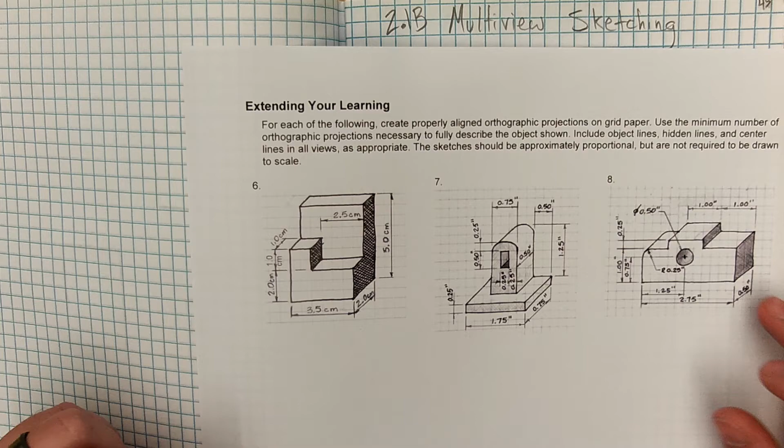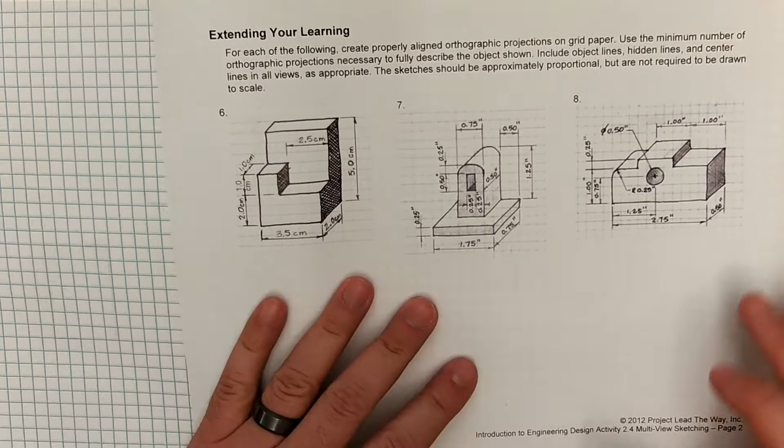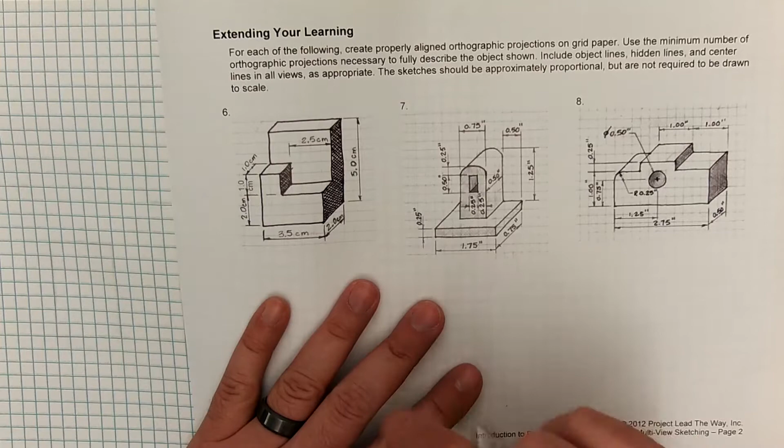Alright, so this is your second set of 3 items. This one has dimensions on it this time, and it is set in not an isometric style this time, but rather an oblique style, possibly a cavalier oblique. I think these actually look stretched out more than they really are.

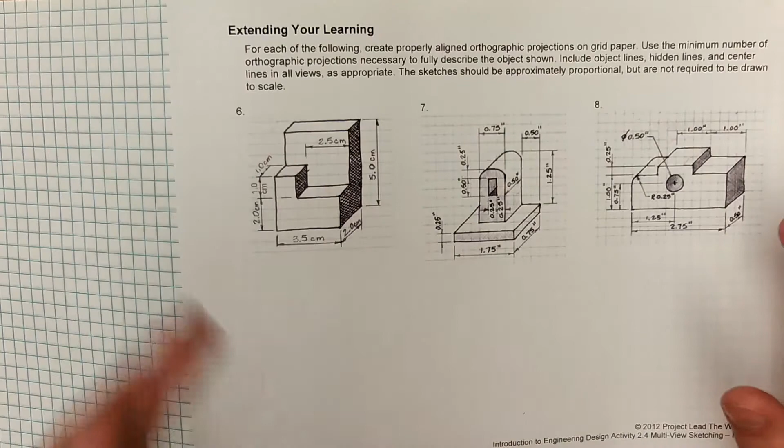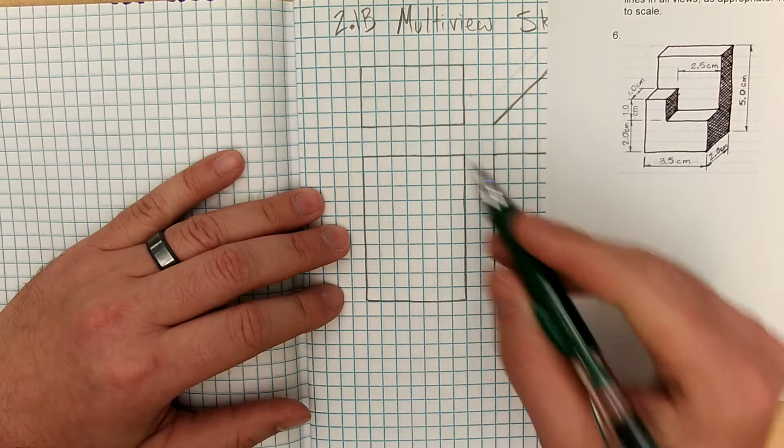So I want to help you get started with this. For this first one, I already have the shapes and overall sizing. I'm going to make every half a centimeter equal a box.

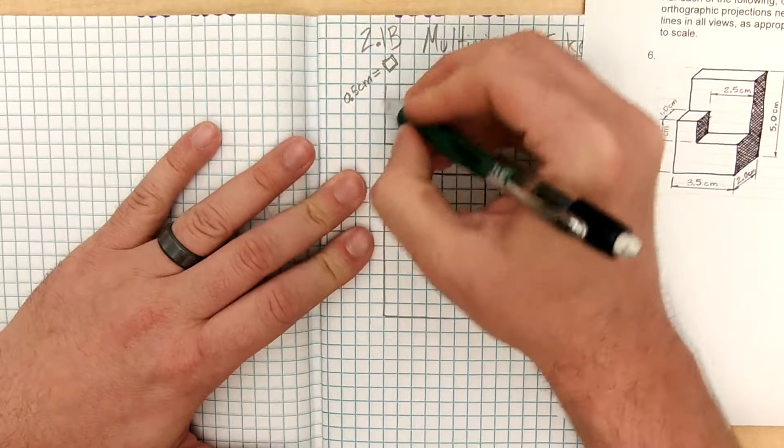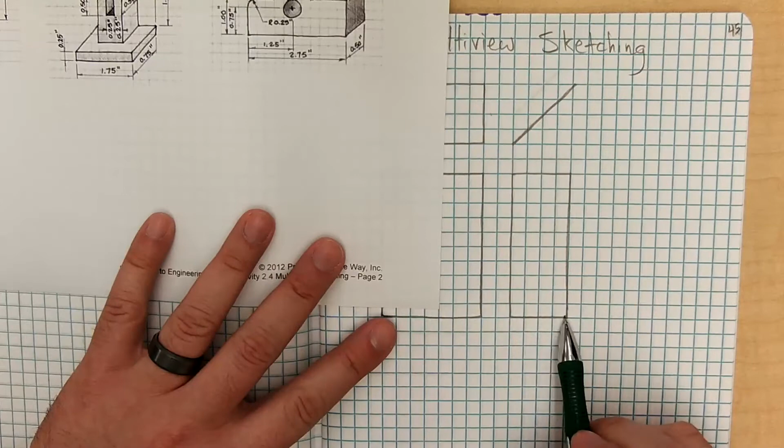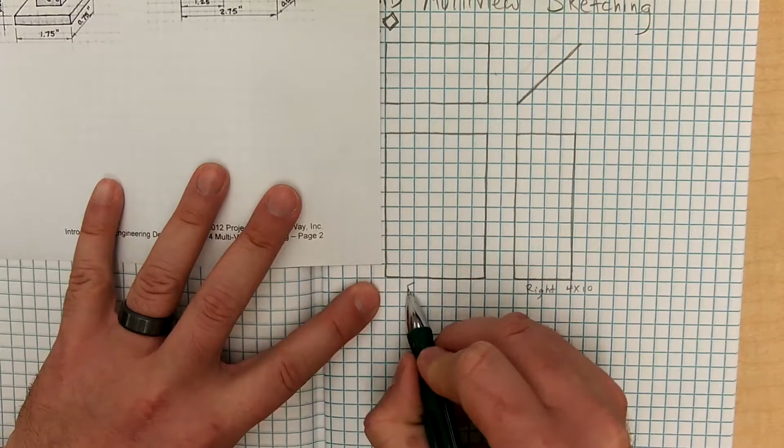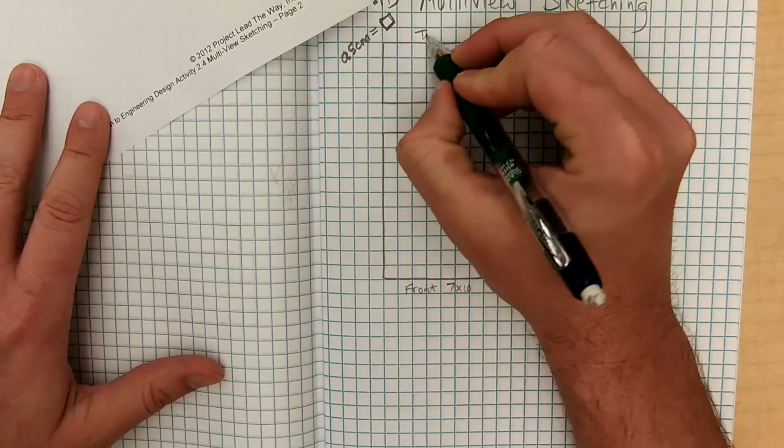So when this thing says it is 2 centimeters by 5 centimeters, that would mean 4 boxes by 10 boxes for the right side view. It's 4 by 10. And the front view is 3.5 by 5, so that would be 7 by 10. And then our top view would be 7 by 4.

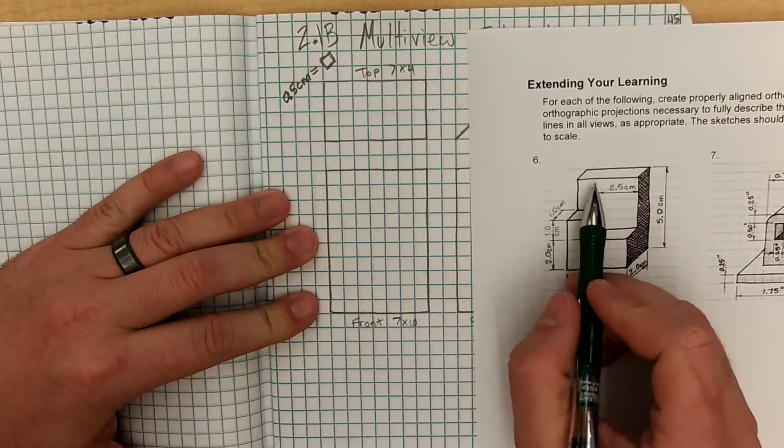Just so you can get the size, I'm going to draw one view for you, and you need to draw the other views. I think in this one I'll draw the top view. From the top view, I have a bar going right through the middle of it. I can tell it's the middle because it's 1 centimeter back out of 2. So I should have a line like this.

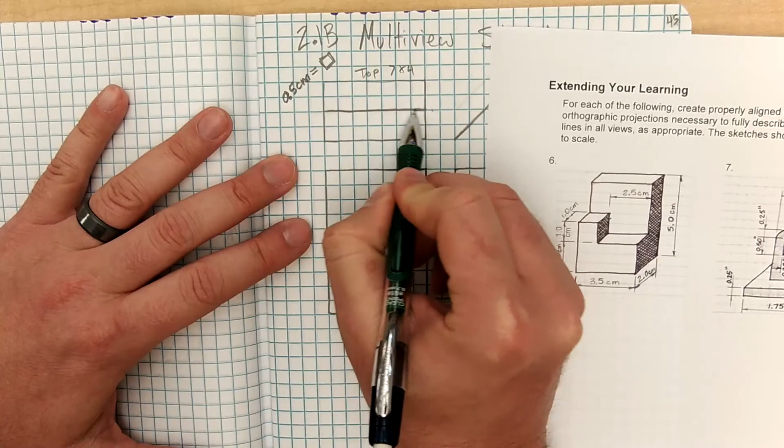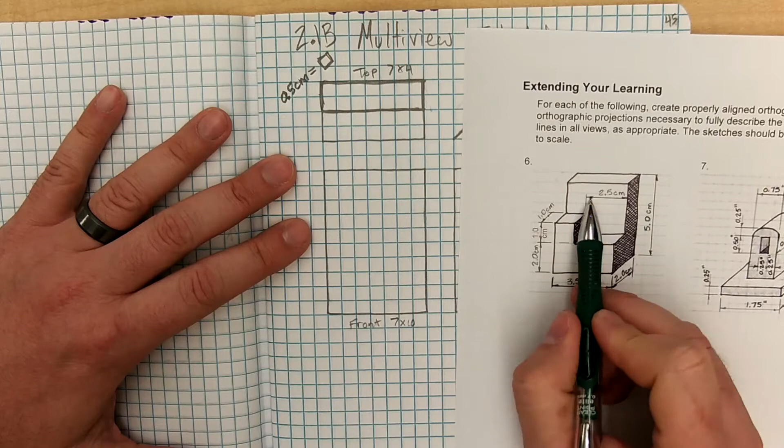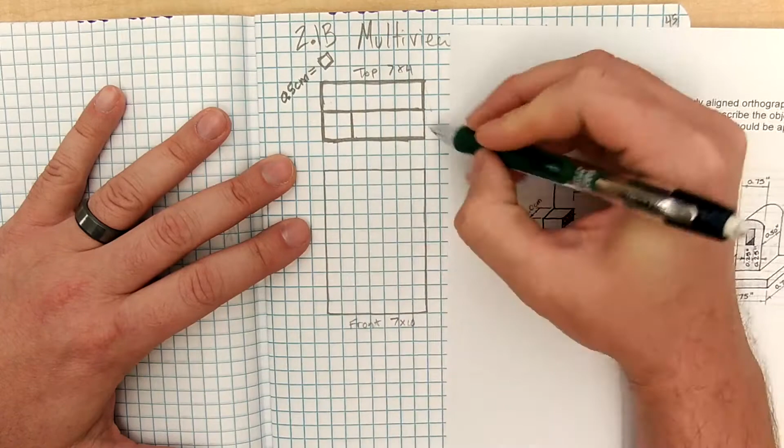And then I've got this box here, 2.5 over, which would be 5. 1, 2, 3, 4, 5. It's a square. This would be the top view of this first sketch. And I'll leave you to do the front view and the right side view.

For the second one, this is an odd shape here for sure. And this is why I think they're stretched out, because this looks like it's really far back, but it's not as far back as it should be.

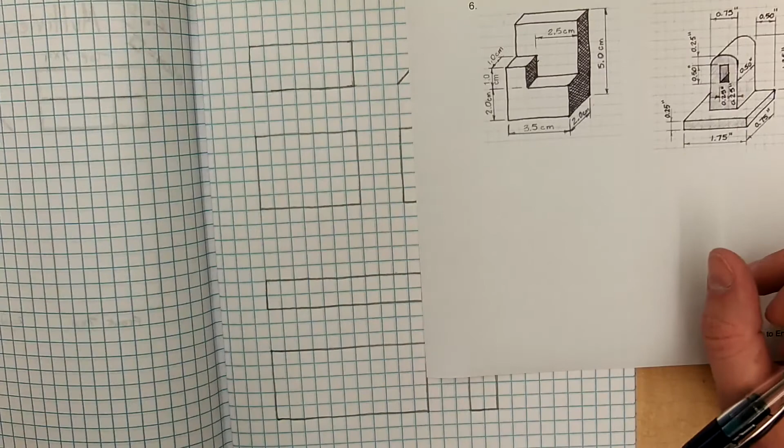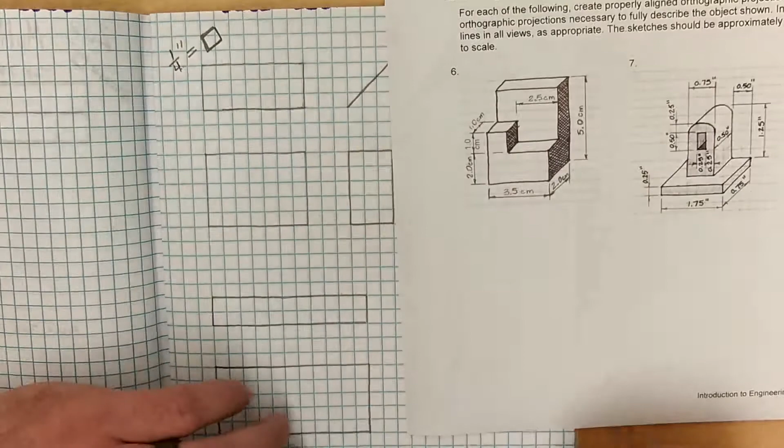So I'm going to draw the side view, the right side view of this shape. The way we're going to do these next two is a 1/4 of an inch equals a square, which is actually what most graph paper is, if 4 of them should make an inch, something like that. So we're actually doing it the way it should look.

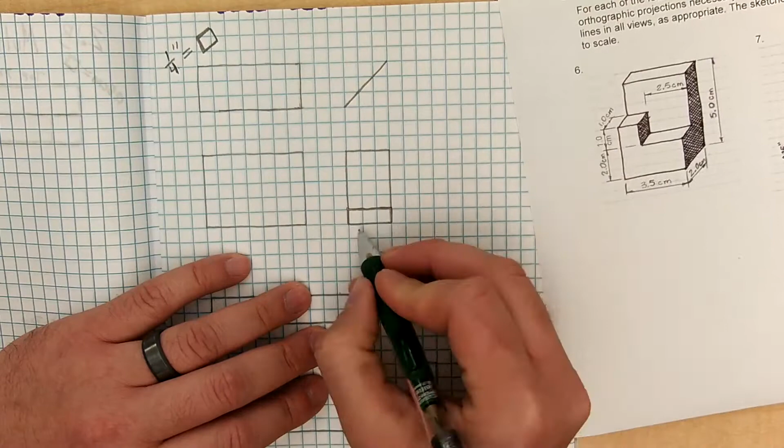So I see that this is a 1/4 of an inch tall, and it goes 3/4 back. So it should have a line here, like this. That would be this base right here. And then it's got this almost tombstone looking thing sitting up. It is a 1/4 and 1 1/4 up. So I made this a little bit short then.

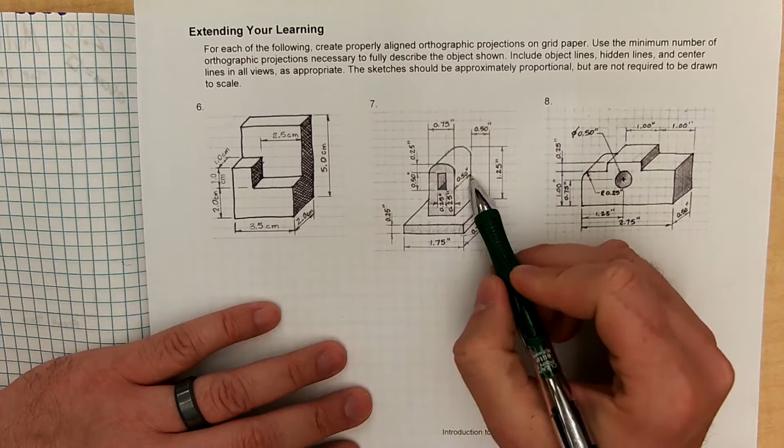So that should be 5 up, and it's 5 across. Or half an inch across, so that would be 2. So 5 up and 2. So I wouldn't need this line here.

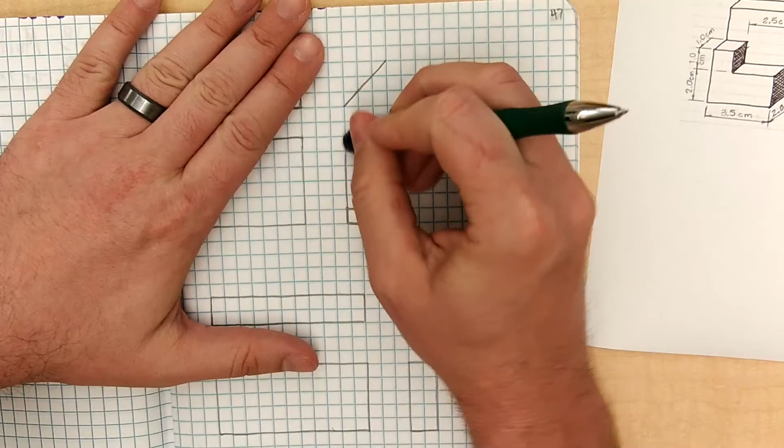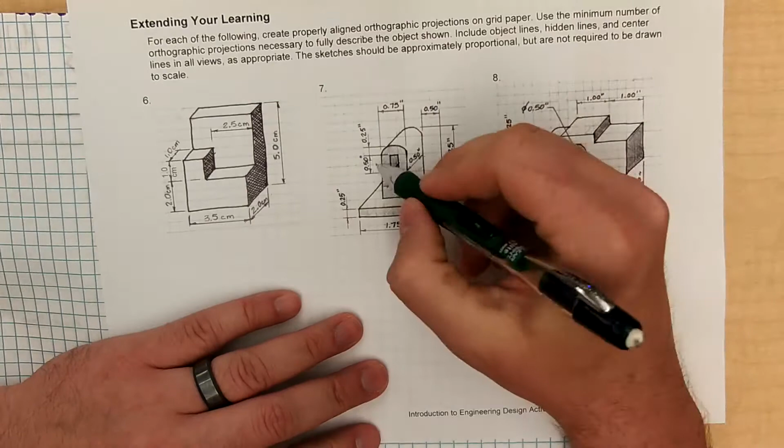And then if you notice on the side, there's a hole that goes through here, so there should be dashed lines going back, and they should be half an inch separated, a 1/4 of an inch down from the top. So it should be like this. That would be my hidden line.

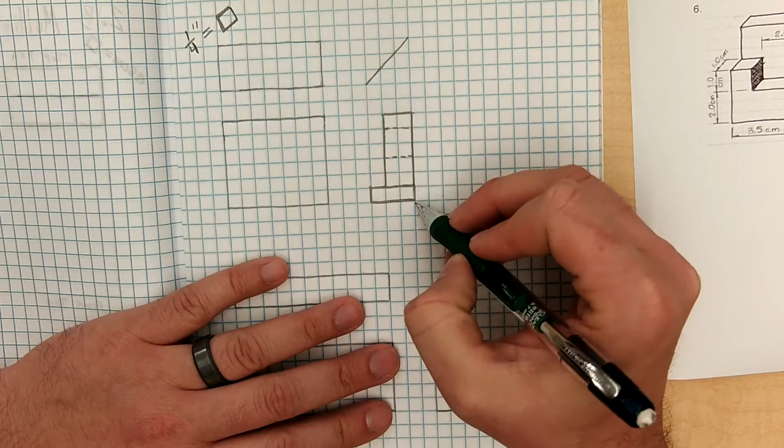So that would be my right side view. My right side view is 1, 2, 3, 4, 5, 6 by 3. All right, so then I get my shape there.

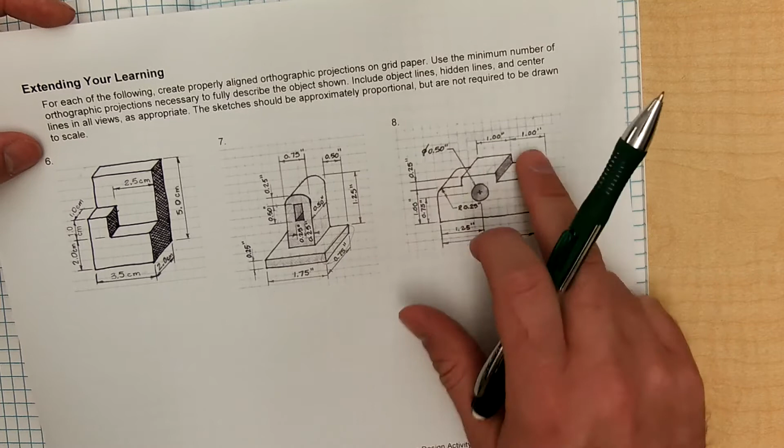Now let's move on to this bottom one. The front of it's pretty straightforward, and it just has uniform depth going back. I think I'll do the top view for it, and make that kind of easy for you.

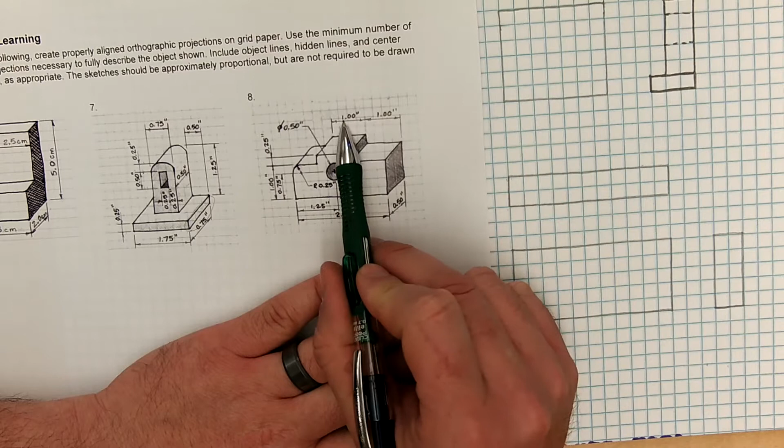So again, it's a 1/2 inch back, so that would be 2 squares, and it's 1, 2, that's 2 inches. And then on this side, we have here 275, so this part's 75, so 275 would be 8, 9, 10, 11, so it should go across 11. Double checking, so 11 by 2.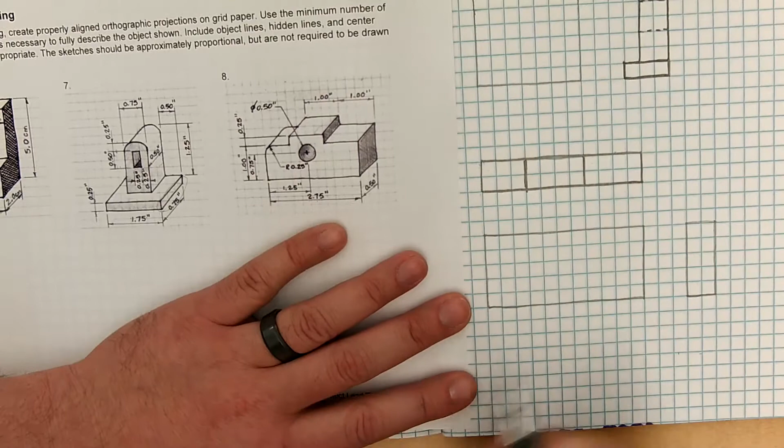And I could finish with that, but I do have this hole that goes through here that's right in the middle of this part. So there would be a center line here, a single dash with a long line. And then I would have a hidden line here, marking that hole.

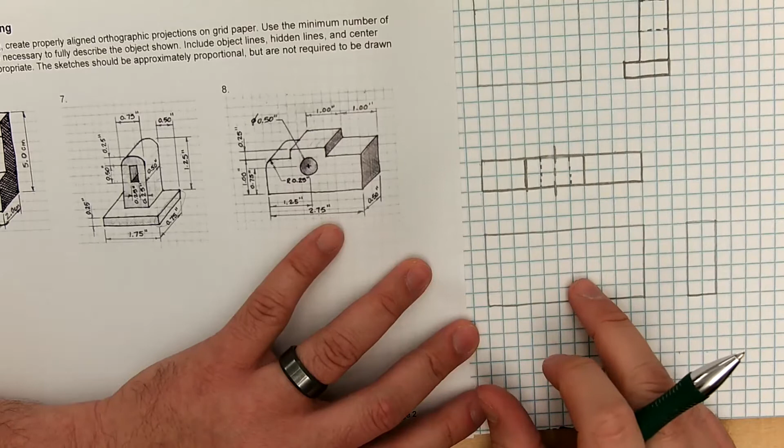And then you'll want to draw your shape down here to these dimensions. It ends up being 1 1/4, so that would be 5 units tall by 11, and then 2 units back here. So go ahead and get the rest of the sketches, and I'll have a helpful video right after this that you can check out.